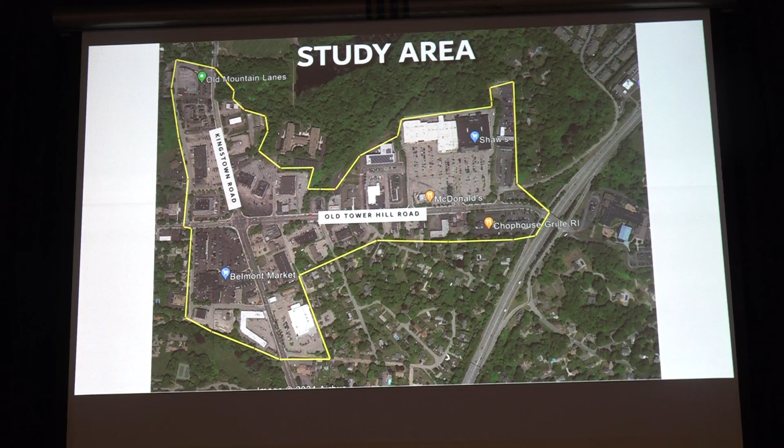25 years ago, I lived in South Kingstown, right on URI campus at Fortin Road. The downtown has changed so much, the bike trail, the campus has changed a lot. This area actually hasn't changed that much. It's been sort of frozen in time by these land development regulations.

Our job is to unlock the potential, but not just economic development. We've been working on a neighborhood plan. It's a guiding document to evaluate development projects, direct capital improvements, guide public policy, and make sure South Kingstown continues to be the place people want it to be.

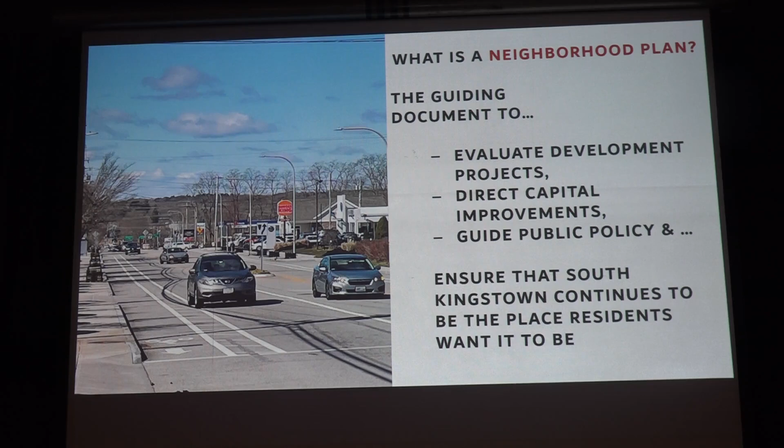And we're building on the work that you've done previously. The comprehensive plan in this town is a document you've all probably participated in. It's a powerful guiding document.

Right there in the comp plan, it says amend the regulations for the commercial highway district, address standards for scale, architectural elements, pedestrian access, connectivity, signage, landscaping, and street trees. So what we're doing here is the implementation of one very important part of your comprehensive plan.

As you know, it's been a week of us working in this studio. We've been open from 9 to 6, every day we've had the open design studio. But as Town Manager Manny said, we're only midway through the process.

We went to architecture school, and we do pin-ups in architecture school. You bring your professors in, you show them, and it's called propose and dispose. You make edits, you make corrections. So the ink isn't dry, the pixels are not dry.

Our purpose tonight is to take input, and when we come back to you again, it'll be revised. It's an ongoing conversation.

After this is phase 3, plan development. We're going to work on a preferred scenario. We'll draft the plan, there'll continue to be meetings, informal meetings, and then a formal adoption process. So just like the town manager said, this isn't the end. But we're off to a great start.

So on Thursday last week, we had over 60 people in the room. A lot of you were here, I see you in these pictures. And you remember working on the table maps.

We have the table maps around the room, 11 tables, some of the most thoughtful discussion I've ever seen, I've ever been part of in many years of doing this. Just like someone said, you've been thinking about this area for a very long time.

Our studio had between 30 and 40 people coming in, over 75 unique attendees. So there are repeat customers, a lot of you gave us quite a bit of your time, which was terrific. But there was also a lot of new people, a lot of new faces.

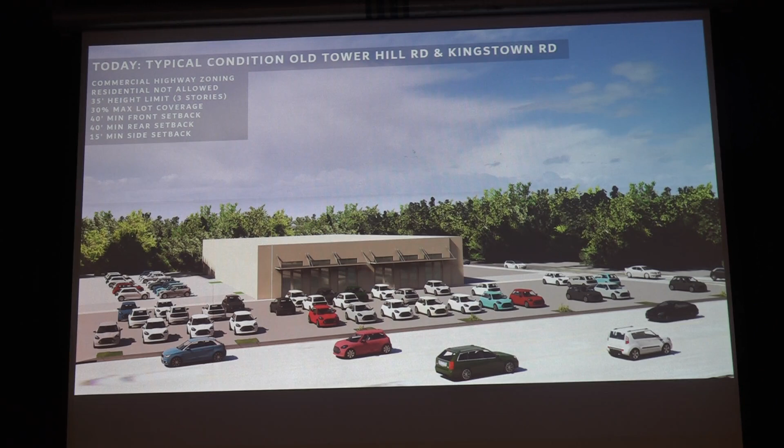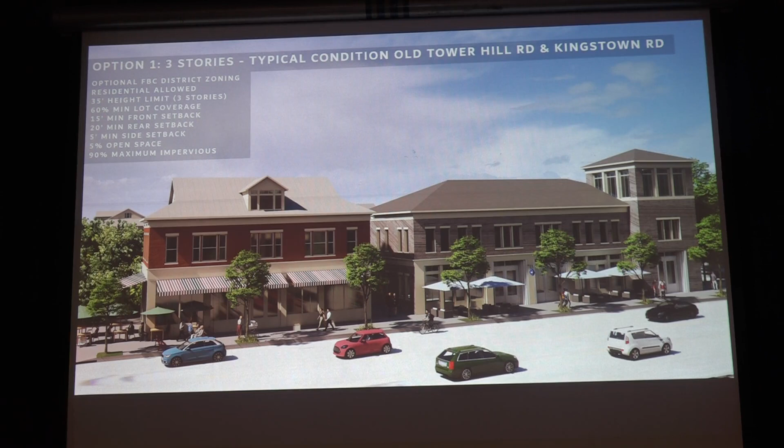We talked about how if you allow residential — right now it's not allowed in that area — if you allow 60% of the site to be developed, and you require open space, that changes the possibility. At 3 stories, things would start to look like this.

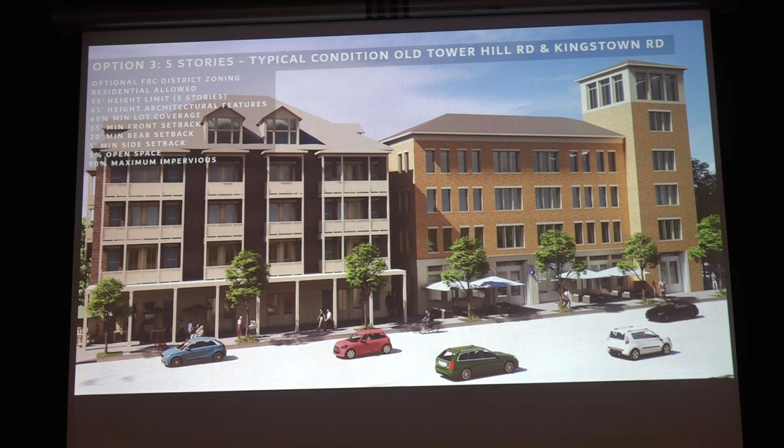We asked you about 4 stories — things would start to look kind of like this. At 5 stories, through the week we've been talking about how there are metrics in terms of income, traffic, and open space — the performance measures.

What was interesting is that for a lot of people, the conversation kept coming back to the Sheldon building. They said that's one of their most favorite buildings — that's 4 stories, and it doesn't feel awful. And then, of course, that's connected to the Bell Block building, right?

The postcards of downtown Wakefield show these buildings. Tourists stand here and have pictures of themselves taken in front of them. Interestingly, if you look at it, this building has roughly 60% lot coverage, and the lot goes back quite a bit.

This building does a pretty good job of putting parking in the back — there is parking behind there, but you can't see it. It also does a good job of buffering the water before it reaches the river. So that kind of thing — when you see the renderings, you're going to see buildings that are basically 3 to 4 stories.

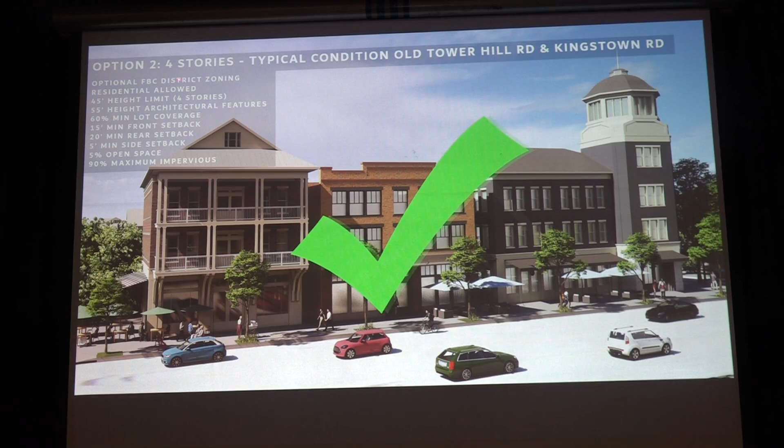And it feels like that's what we're going to be codifying. So if we change the regulations, have a conversation with businesses—this is the heart of town, the intersection of Kingstown Road and Old Tower Hill Road.

This is the spot where it's a four-corner intersection. Starbucks would be behind the viewer in this case. Unfortunately, it's a big, long expanse of asphalt, glowing backlit signs, trees surrounded by asphalt, buildings that have gotten a facelift but it's still a kind of corporate architecture. So what if we change the regulations to allow the development community to do more? We would go from something like this to something like this.

So here we're requiring open space. Here we're allowing them to build on more of the site. We could still have Wakefield Liquors, we could still have the bank, and when we did the parking calculations, you could still fit—there's still enough to park it. This is a mixed-use environment, which is to say this is probably commercial, this is probably a store, this looks like a cafe, there might be offices above, and probably living above on a couple different floors.

Natalie did a good job of looking at local architecture and reproducing some of the best. She put in a gazebo, she has wayfinding signage, there's a stone wall, just like this very New England, South Kingstown kind of thing, in order to keep people from going this way in the intersection.

In plan, again, it goes from buildings in the middle of parking lots to green spaces, buildings fronting those green spaces, and ultimately parking in the center of the block. This is called perimeter buildings—this is how you make a main street. Now again, there is a step here where the bank and the liquor store and the other businesses stay, could work. This is the smallest increment of urbanism that will still transform the place.

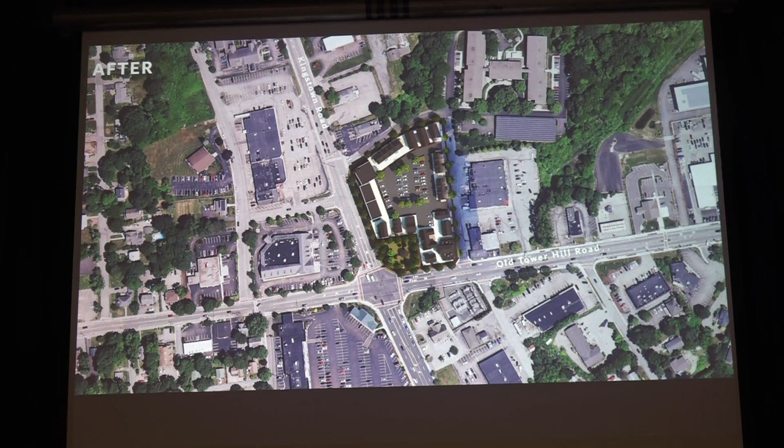Then we started talking about architecture in the studio quite a bit. South Kingstown is a mix of styles—terrific colonial, Richardsonian, big amazing public buildings, this quirky strange Victorian you see every once in a while. There are Greek revival structures, there's the arts and crafts train stations, that one, the Amtrak one, and there's some spooky Gothic revival every once in a while, Nathaniel Hawthorne red.

It looks awesome, so it's a mix of styles, but when people were articulating the styles for the area, they talked about it in terms of coastal architecture—this sort of beachy, shingle, white trim stuff, the gambrel roofs, the little towers, the very folk Victorian, sort of an L with a porch in the front, the modified salt boxes, simple, restrained, ultimately Quaker style became Victorian, and a sort of modern rendition, a Cape Cod influence. Right, so coastal architecture.

Then there's also, in this area, the mill architecture. These buildings are the castles of America, with the turrets and the crenulations and the stonework, and a lot of American mercantile structures—you can see new structures have been taking notes from, like this one, which hasn't been there that long. You can see some of the forms, shapes, and materials are coming from mill buildings.

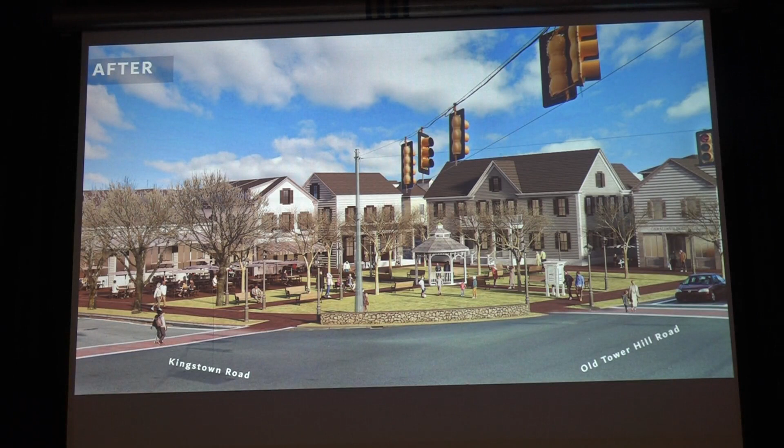So that brings us to our first question: what is the style? What should the style be for this area? It's only, what, 20 minutes to the beach—coastal architecture—but it's very close to the mill area, to the river. And so what we started with was an architecture that looked like this, inspired by those sturdy stone structures, with towers that look like the towers on the factory buildings, with sort of hip roofs and block structures. Anyway, we're just curious.

When it comes time to codify what this area should look like, I'm going to ask: who's in favor of the coastal? You raise your hand. I'm going to ask: who's in favor of the mill building? You raise your hand.

And if you don't like either of these, don't raise your hand. So I'm curious, how many people feel like the architectural design guidelines should be coastal? Raise your hand. But wait a minute, it depends on where it is. I think I'm going to vote for both of them.

Now, this is a relatively small study area, but would you do mill architecture in one part of the study area and coastal in another? Well, that makes their job harder. But that's interesting, that's interesting.

All right, let's do coastal, mill, or both. First, just coastal... all right, got it. Just mill, so that's interesting. We have 25 saying coastal, we've got 8 saying mill. And how many people believe we should do a mix? 35. All right, let's do that. Oh, that's neat.

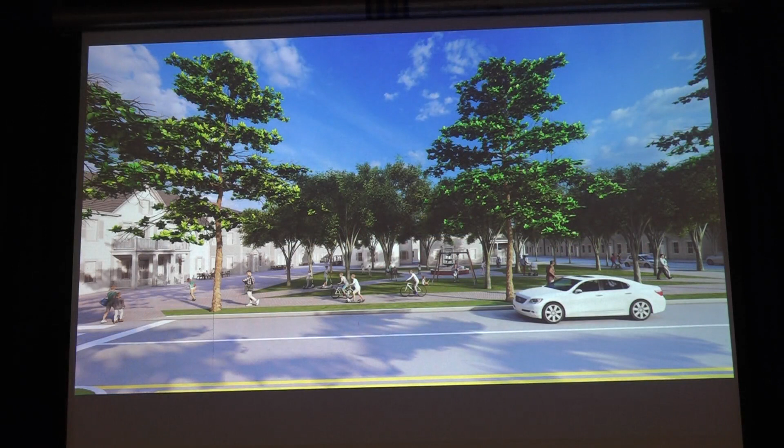So Kessie was working on that same formula. What if you start with a green space, the New England village green, start with that, and then there are buildings around it, parking disappears, and then you make a real commitment to trees. The way that would look in plan is, here's the job lot site. It's an enormous site.

What the design team did is they broke it into blocks, small blocks, with streets coming through it. That's a pedestrian street. They created a walkway, a pathway. This is not a vehicular street, it's a walkway into the neighborhood area. They put residential there because there are houses nearby. You want to be a good neighbor.

And then they transitioned from residential into a commercial area. So if you're a neighbor walking down, say from Wakefield Pediatrics, down Holley Street, right now the view is the back of the job lot. The businesses there turn their back to Holley Street. Buildings can only have one front and one back, and it's the back. We designed it, according to the design guidelines, so it could possibly look something like that.

This is a pedestrian street. We don't have very many of these, there's none in our district, but this is a cool and interesting way for people to... The other thing we were talking to Sean about, let's go back and look at this. This area can only support so many coffee shops, souvenir shops, spas, fine dining, or diners. We're going to need to find uses for these sites other than service, other than sales.

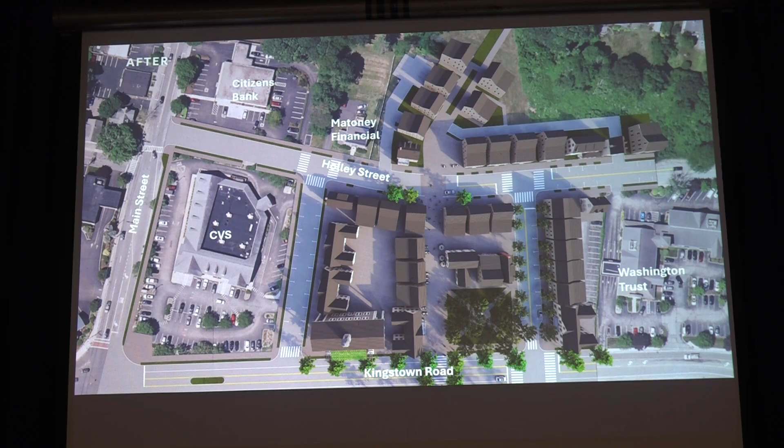Sean and I have been talking about the idea we heard from the public, that there needs to be a partnership with the University of Rhode Island. We do a lot of work in Pittsburgh, and there the big campus, Carnegie Mellon, has their campus, and then off campus they have a tech lab. That tech lab is where professors work with interns and students.

And then those students go on, and there are publicly financed and funded business incubators. There are grants from the federal government, from the state government. So those students learn in the tech lab, they start their business in an incubator, and then their small startup stays in these corridors. The same thing happens in Boston all along the 128 corridor, innovation corridors. So there's labs, there's office, there's lodging, there's retail, there's dining.

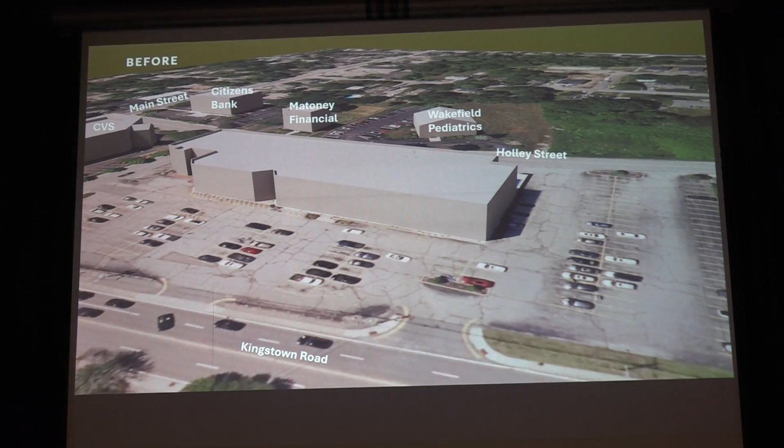It attracts corporate partnership. It's great for retaining young people and at the same time giving them high-paying jobs. It's great for the tax base, it also diversifies the local economy. So the thinking was that the job lot, for all it contributes to the community as great as it is, could be a lot more. This could be a satellite campus in a way to the University of Rhode Island.

It could be a way where kids get their start, where they could be living in inexpensive spots, and they could be learning in another.

They could start their business here, move their business there. All of that could be happening in a spot where they can get lunch, get breakfast, or have dinner. Our firm designs these kinds of things.

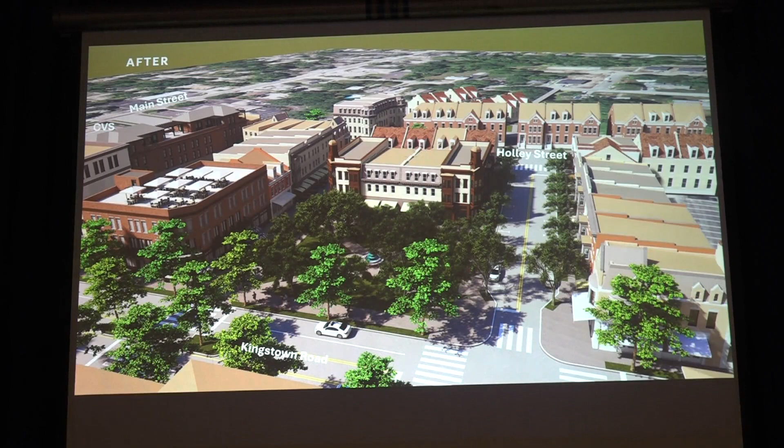This job lot site in this college town would be a great place for it. I was going to ask, because originally it looked like this, and then we toned down the architecture. I was going to ask, which way should we go, coastal or mill? We've already decided that question, right? The mill building architecture is heavy with brick.

It uses turrets, uses clay colors instead of the grays. Our coastal architecture, our rule of thumb was if you can't find the color on a seagull, you can't use it.

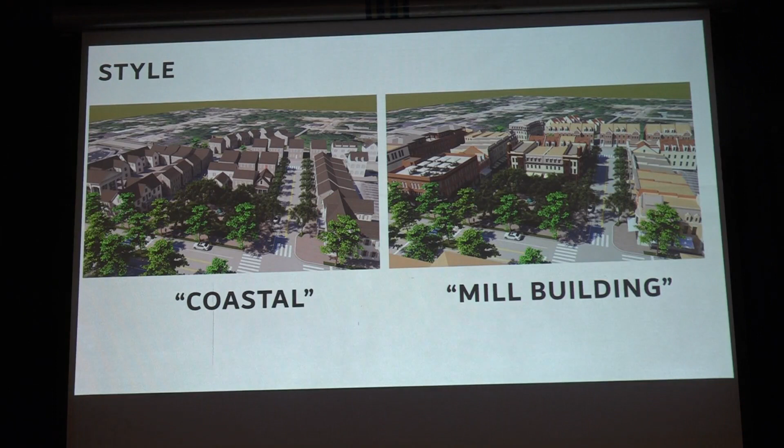And this is something different, right? This is a sort of Italianate look. So I guess what we'll be doing is working on design guidelines that allow for both.

All right, another big idea: increase access to nature and build sustainably. This is a town very much committed to trails. I had never walked the trail behind South County Commons, which gets you all the way over to Old Mountain Field. It was cold, but there were people on that trail.

This is a town in the Old Mountain Field that has a new master plan. The thing about the trails in this part of town is that there's the wonderful award-winning bike path that is so terrific. There are the new protected bike lanes, or separated bike lanes, on Tower Hill Road. There's that great path to South County Commons, and there's some footpaths through the woods, unpaved, small little pathways.

And the thing is, none of these are connected. They're all independent of each other. People have been coming in and saying, how can we connect these? So our idea is that hand in hand with new development, there's also new investment in public facilities like these trails.

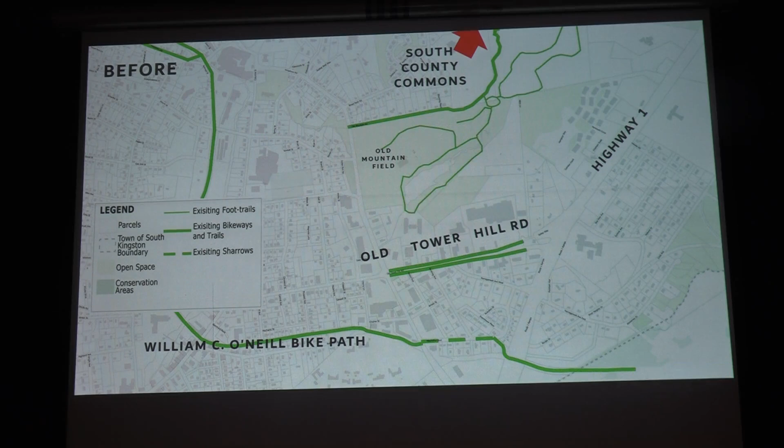I had a chance to walk the trails. We imagine that as Old Tower Hill Road develops, there are paths that go in. These should be ADA wide paths, things that people can walk.

The reservoir is there, so it's a spot you've got to stay out of the buffer and be careful around. It's a sensitive area, it's an aquifer lens. But you can have paths.

So what we're trying to do is connect that South County Commons path that goes to Old Mountain Field down into the study area. These are sort of spurs, circles. People like to walk, they like to know their distance, and they like to not have to retread on the same spot.

They were looking at ways we could connect the bike path, continue it. Right now it feels like it ends in a lot of ways over on Kingstown Road. What if, instead of going along the street, it was actually connected along the right of way? The bike path continues. And then what Pam was working on was an on-street bike path loop.

So people would be going down the bike path, and there's sort of like the spur, the Wakefield—I don't know how to describe it—Uptown Wakefield spur. You'll be able to take that spur into this area that we've been describing, right? It just provides options.

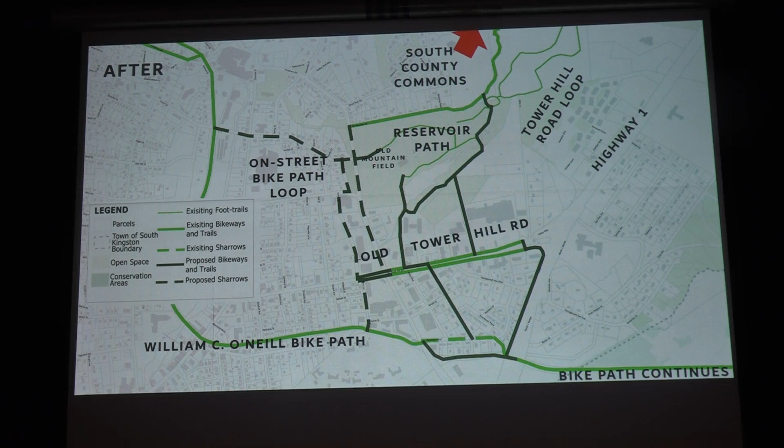So now Cassie's going to take us through a couple more, with a special emphasis on those trails and those connections.

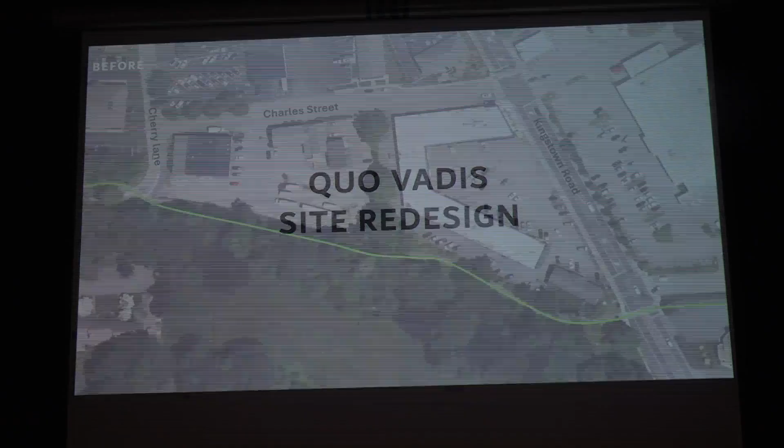So I worked on the Quo Vadis site redesign. Currently, this is how the site looks now. One interesting thing we really liked about this site was that the trail is right behind it, but right now the current mall is basically turning its back away from the trail. So we wanted to really work on trail-oriented development.

So this is how it could look if you change the code. The corner building here could be a corner store, a mixed-use building with commercial on the bottom and residential on top. These could be mixed-use buildings that front Kingstown Road, 3-stories high, commercial on the bottom and residential apartments on top.

And these are townhomes fronting the trail. What we liked about this is that we didn't put the residentials facing Kingstown Road because that's more of a vehicular road. So we thought it would be a good idea to have residential fronting the trail, because it would be a more comfortable area for residential. And on that corner, fronting Cherry Lane, is a multiplex building that can fit about 10 units.

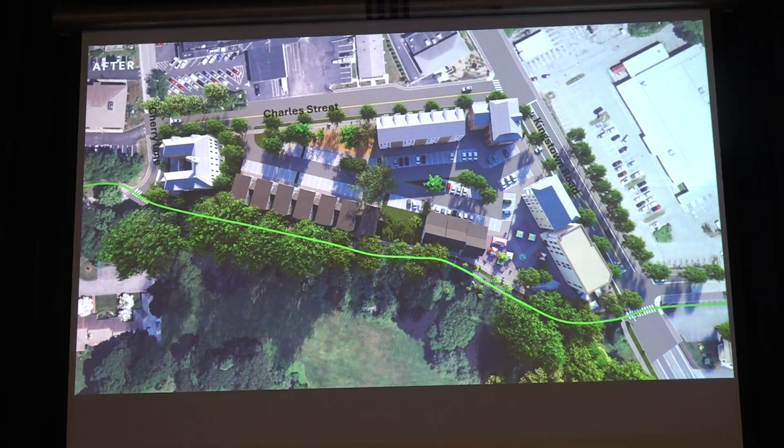One interesting thing I did about this site is that I calculated all the existing commercial areas that we have, and I made sure that we still retain a similar amount of commercial on the bottom, but we're able to go up a little bit more and have residential, which would allow for a mix of residential uses like apartments and townhomes.

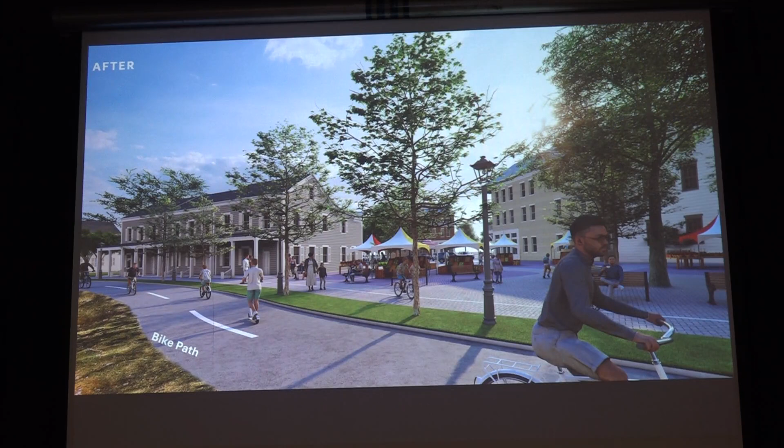So this is what it could look like. On this corner, you have an open space that could be used as a market space. You have the townhomes fronting the trail, a nice bike path lined with trees on the side, and it creates a nice buffer between people on their bicycle on the bike path and people on the sidewalk. It's just a nice environment to have residential on that corner.

One good thing about the pavers is that these are permeable pavers, which means the water will not sit on that plaza, so you still get the same result as if you had grass. Pavers are also less maintenance and easier to maintain than grass. With grass, you always have to mow it and take care of it, but with pavers, you just put it once and maybe do maintenance on it once a year. So that's one thing to keep in mind.

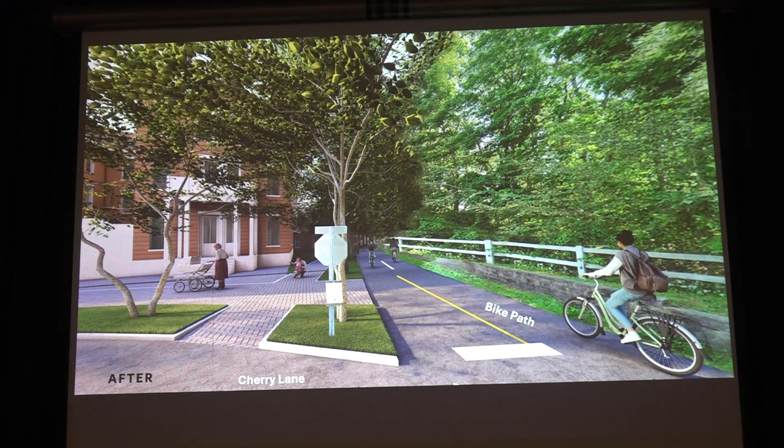So this is the multiplex building that I showed on the plan, and it's a trail-oriented architecture. It's more comfortable, so you have housing in this area. One cool thing about this building is that it can be an entirely residential building, or you can have the bottom floor be commercial as well.

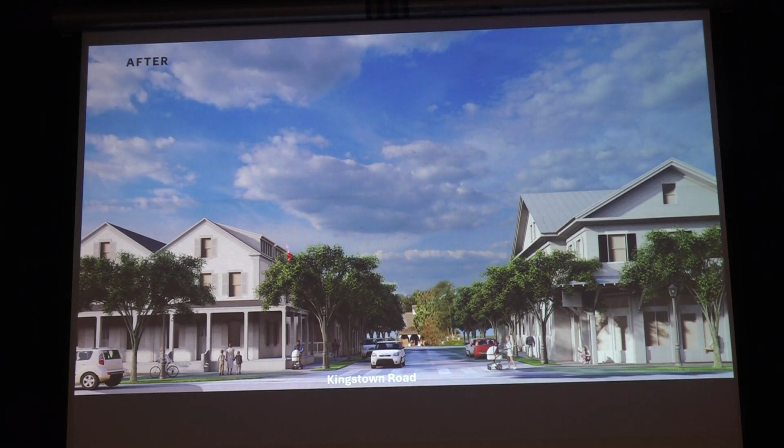I also worked on the Midas site redesign. This is how it looks right now, as you stand on Kingstown Road looking at the site. And this is how it could look — you have mixed-use buildings here, again commercial on the bottom and residential on the top floors.

When we were looking at this site, we noticed that this building here was a really cool building architecturally, and I believe that's the building for the farm that's in that area. So we made sure to maintain that building when we were envisioning what could happen with this site.

Now I'd like to hear from you guys. What do you think? Which one do you prefer — the vernacular New England architecture, or the more classical architecture? So raise your hand if you prefer the vernacular New England architecture. How about raise your hand if you prefer the classical?

Okay, that's a bit easier for us.

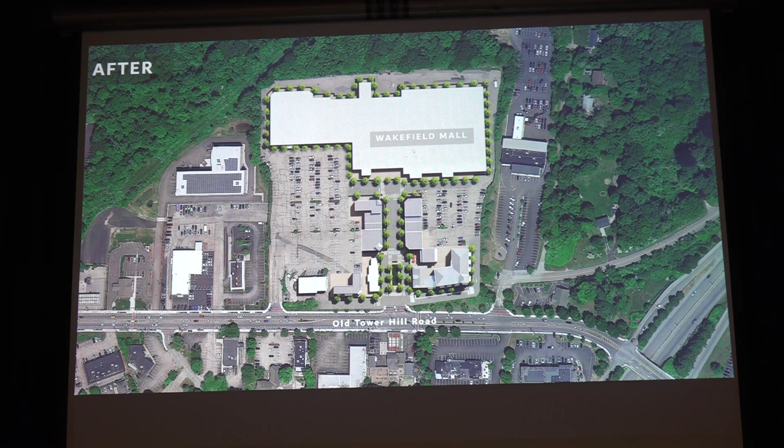It maintains the mall, the People's, and the McDonald's, while creating a place that you really arrive to. As it develops in the future, it can create continuous blocks all the way across, a parking lot, a parking garage to make up for lost parking that we could have in the future, as well as the removal or relocation of these businesses into the same site.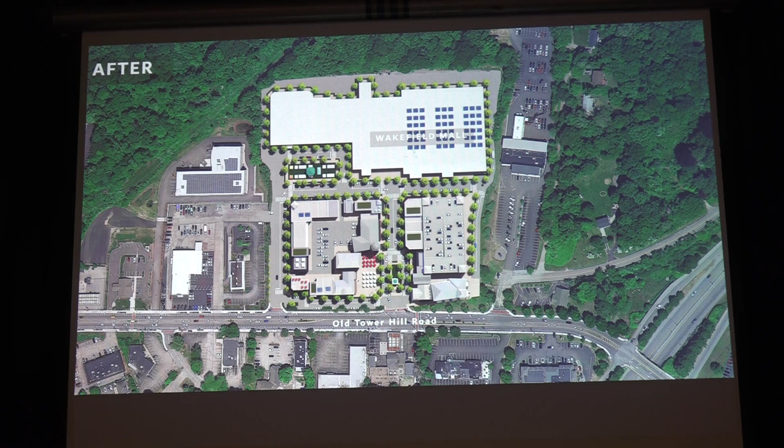So if you were to move the People's out of here and remove that building, you create a plaza space where people can gather, have outdoor dining, while maintaining commercial on the ground floor.

This is what it looks like now. This is what it could look like with just that first phase. So you would have a location that you really arrive to, with on-street parking. The People's is maintained as it's there, but you create a real place to meet.

You'll have buildings, and this one actually has a mix — mill style, coastal style, a little bit of everything. The People's remains, or it could be removed, and you would have a plaza space with outdoor dining. You have wayfinding as well, and a biking trail goes across.

We were looking at the styles and colors as we went through the process of the entire week. We heard to have more variety — different, more mill style, more coastal style. So we have options for you all.

This is what it looks like today. This is what it would look like with the first phase. And this is what it could look like with future development.

We would have the parking garage in this area. You could have solar panels above the mall, green spaces, outdoor dining, rooftop dining. This is a multimodal destination where you could rent scooters and rent bikes.

This is where the bus stop used to be. Bring the bus stop back in, have a trolley system.

Question: when you do these designs, is it taken into consideration about the service vehicles, the delivery 18-wheelers that have to go behind the Wakefield Mall or to all these other shops?

Yes. Because of the way the trees are around the mall — and I know this is just an idea — trucks couldn't make it around that area in that version. Well, in the existing condition, the trucks go along here, and as it continues, that same path is present. Most likely these trees won't actually go in, it's just to add some green color, but the same width is maintained, so you'd be able to go all the way around.

Can I ask — as I look at your designs, you've increased the building density a lot, which means you've removed a lot of parking, and aesthetically that's wonderful. Now you've mentioned parking garages a few times. So what is your thought — does the developer be required to put in parking garages? Are they open garages? Does the municipality own them, or how does that work?

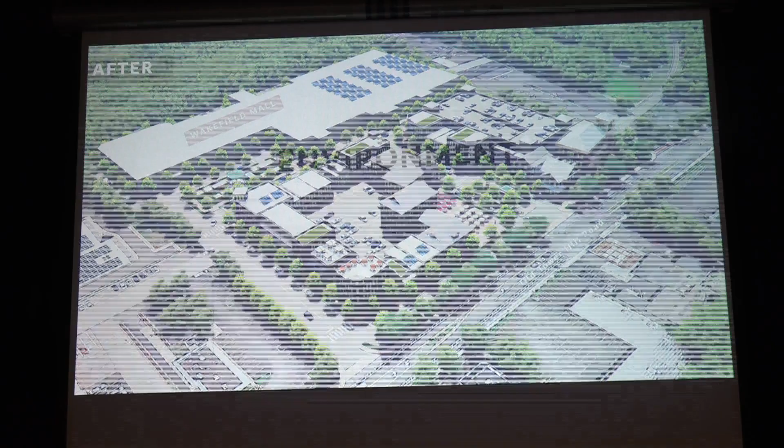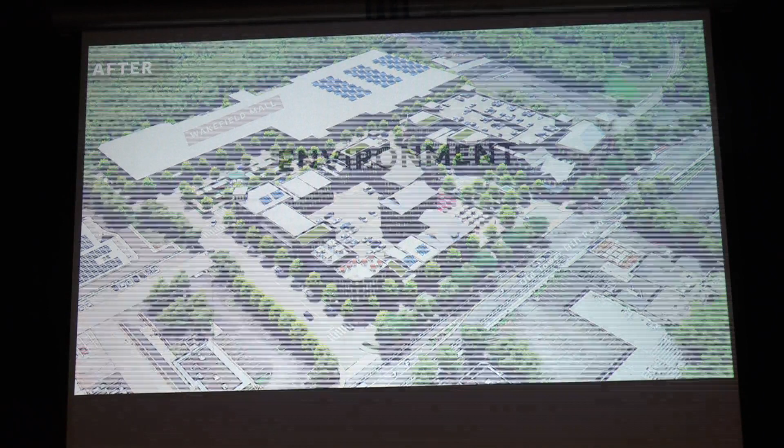Another look is the environmental aspect of this. As you can see in this render, we're bringing in green roofs, solar panels, and the permeable pavers we were mentioning before. These are big environmental benefits, which is important in this area as it's a sole source aquifer. You really have to look at where the water is going on the sites. You want to make sure that once it gets to the reservoirs, the rivers, the estuaries and the ponds, it's been filtered at some point.

Can you speak up just a little bit? We're having trouble hearing you in the back. Okay. As you create these sites, you have to make sure that these new developments are filtering the water in some way, either filtering or maintaining that water, keeping it on site.

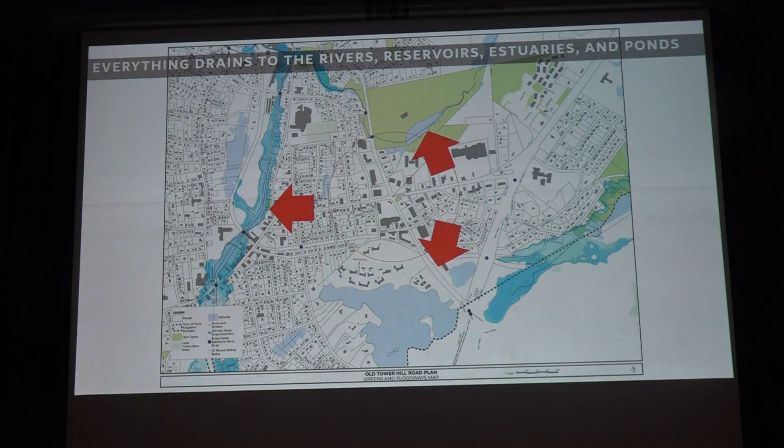These are the main waterways going into the aquifer in this area. This is green infrastructure—you started to see a little bit of these swales going onto Old Tower Hill Road. But what you really need there is plants that will suck up anything in the water and filter it before it reaches the aquifers.

Another green infrastructure you're seeing in this presentation is pervious pavement, which allows water to go through the ground in the spaces between the stones. There are levels to it: you could have permeable pavers, or crushed stone as the simplest way to create the same effect. You could also have vegetative swales, putting plants into the swales we've seen, or retention ponds that hold water before it moves on to the rivers.

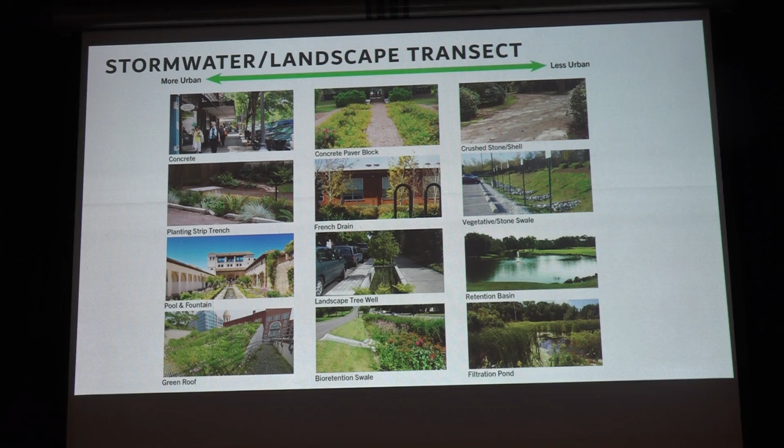And it's what we've been hearing throughout the presentation, all the way to today—that we need to plan for these new developments and plan for the environmental impacts they'll have on these areas, as well as creating a place, a destination.

Is anybody in favor of one over the other, or some new style?

Sculpture could be cool, but not that. A local artist.

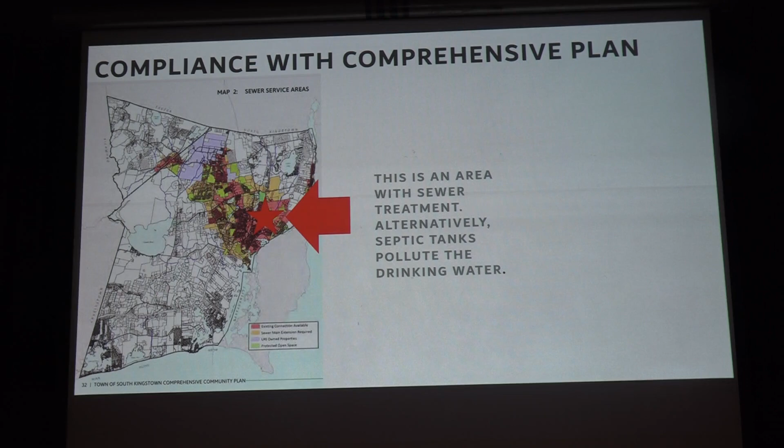For example, like the back of the Job Lot building, this white building, what about a nice mural for today? Maybe the State Council on the Arts would work with the town so that over a period of time there's a new mural every 6 months or something, such that it invites people to come see the area and shop. Also Tower Hill Road, there's been this transition to kind of go green, the Department of Highways has made a small contribution, etc. So I think the comments about greenness are very, very important.

One question I have, two questions. One is, when we first moved here from Massachusetts, everybody said you can't shop in Wakefield, you have to go north of the tower, and no one wants to go north of the towers. What plans do you have to bring in some department stores or something that people can shop at?

Right now we have a Job Lot and Marshalls. Yes, hopefully with all these new ideas and new proposals there would be the opportunity to bring in more businesses. First you need somewhere to put all these businesses, and for that it needs to be redeveloped. So that's the first step, is to allow the development. We've got a lot of empty buildings now, so.

We've got one more piece, and then what'll happen is we can adjourn around the maps, around the plans, we can answer questions. I want to point out, when we do adjourn and have those conversations, that the Illustrative Master Plan is a really important document.

It's interesting, everything that we've been showing is basically red buildings - red for new development, green for new greens. It feels like we're talking about a big, huge wholesale change, but realistically we've only been drawing perhaps half the corridor, because only half the corridor really has that development potential. We're not eliminating any roads. Red is new, and these are actually relatively small structures throughout. Only occasionally would they be large enough for the larger change that we're talking about.

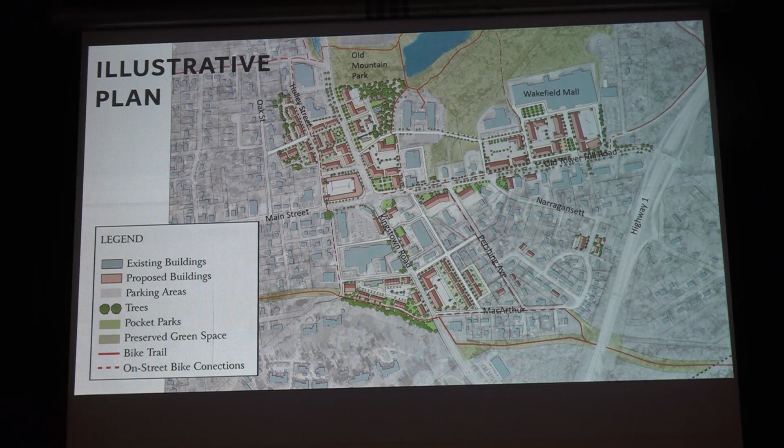One thing that the plan does do, it's hard to see from where you're at, so what Pam did is she created a zoom in. What the plan is doing is adding new buildings, but also adding a lot of greens.

Pam showed in this little part of the illustrative plan, there's the central green by Wakefield Liquors that we were talking about, so that's one kind of green, one kind of water retention, one kind of natural filtration system. Memorial Park is already there, so that's kind of nice.

With new development comes small parks. Right now all the green spaces are just leftover little remnants of the subdivision process - just a little green over here, a little green over there, whatever the setback wouldn't let them build into. What Pam was trying to do is build coherent greens and linear parks.

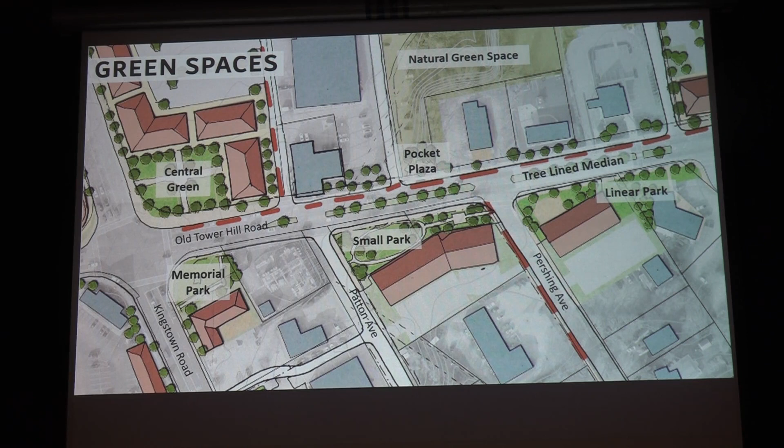She's identifying in what will become the technical plan - there's the illustrative plan, and then there's the technical plan, essentially what we call a transect map. It identifies all these areas, because it'll show that build out will be a certain percentage of buildings, a certain percentage of open space, and that open space number will go way up. So you're developing, but that's hand in hand with green space.

We love big, huge redevelopment like Natalie was showing, billion-dollar reinvestments in parking garages. But to be honest, this would be the first steps of a plan like ours - very small first moves. Now, I know you've got questions about implementation and about financing. This is the last section of our presentation, and then we can do questions and answers.

Sean will present - he's got 8 or 9 slides. Then Kessie's going to ask if the plan is on the right track, and you'll have a chance to vote on some of the specific ideas you've seen and about the plan in general.

Let's just talk for a few minutes about implementation, then we'll ask some questions of the group, and then we'll break down into Q&A. All right, since everyone was having a hard time hearing me earlier, I'm going to come closer to you.

It also helps because I'm short.

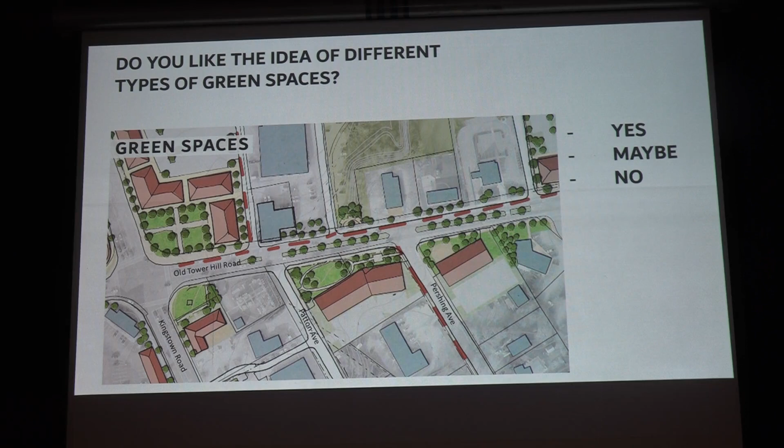Do you like the idea of different types of green spaces? Raise your hand if yes. Nice. Okay, now let's take pictures. Raise your hand if maybe. Okay, one person for maybe. Raise your hand if you don't like the idea of having green spaces. Okay. All right, next question.

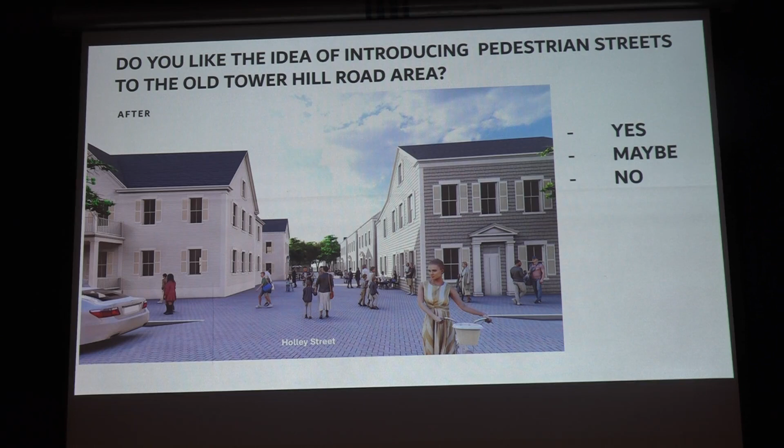Okay, next question. Do you like the idea of introducing pedestrian streets to the Old Tower Hill Road area? Yes, raise your hand. Okay, maybe, raise your hand. Four. No, raise your hand. All right.